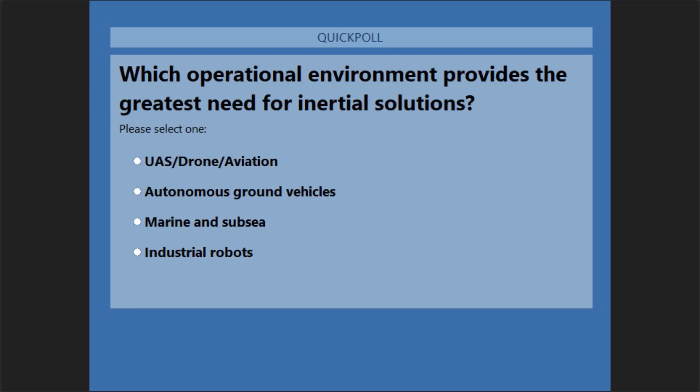Absolutely. Coming up on your screen is the first of our polls for today. If you wouldn't mind weighing in on the following question: which operational environment provides the greatest need for inertial solutions? Is it UAS drone aviation, autonomous ground vehicles, marine and subsea, or industrial robots? So coming in with 43% UAS drone aviation, 34% autonomous ground vehicles, 15% marine and subsea, and 9% industrial robots.

Alan, any thoughts here? Well, this question is what our British friends might call a poser.

It's a pretty difficult question to answer because all of the candidates, with the exception of the last one, industrial robots, all of these environments represent a great need for inertial solutions. We had a bit of a hidden agenda with this question because I think people answered according to which environment they are most active in, but we'll leave that up to debate. Certainly drones need inertial, autonomous ground vehicles do too, and marine and subsea, it's pretty hard to live without it. So I think what this answer reveals is the participation of various segments of our audience in these particular sectors.

We'll find out more as we go through the webinar. We're going to hear today from three speakers: Ralph Hopkins, Skip Ashton, and Roger Ward.

First up is Ralph Hopkins, a distinguished member of the technical staff and a group leader in the Positioning, Navigation, and Timing Division at Draper. Ralph is responsible for the design and development of inertial instruments and sensors. He has served as Technical Director of Advanced Inertial Instrument Development Programs, including strategic, navigation, and tactical grade gyroscopes and accelerometers. He is an invited speaker for short course tutorials on inertial instruments and inertial technology and has presented internationally for the NATO Science Technology Organization sponsored lecture series and symposia on navigation technology. He holds a bachelor's and master's in mechanical engineering from Rensselaer Polytechnic Institute, a master's in engineering mechanics from Columbia University, and a master's in engineering management from the Gordon Institute of Tufts University.

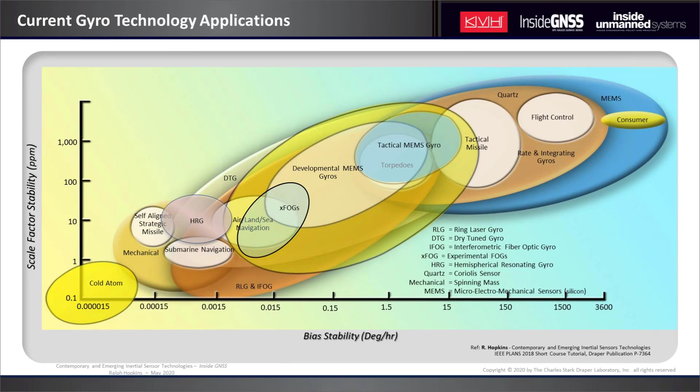This chart is an attempt to capture the performance and application space of different gyroscope technologies. We have the two key inertial sensor performance parameters plotted on the two axes: bias stability on the x-axis, scale factor stability on the y-axis. In the region of the origin, we're in an area of very high strategic grade performance. As we move out diagonally, we enter into the navigation grade and coarser tactical and consumer grade performance regions. This chart illustrates what I like to call the small gyro problem, in that miniature MEMS technology hits a performance wall at roughly around 1 degree an hour bias stability range. Higher performing gyros are all larger scale devices, such as optical and good old-fashioned spinning wheel gyros.

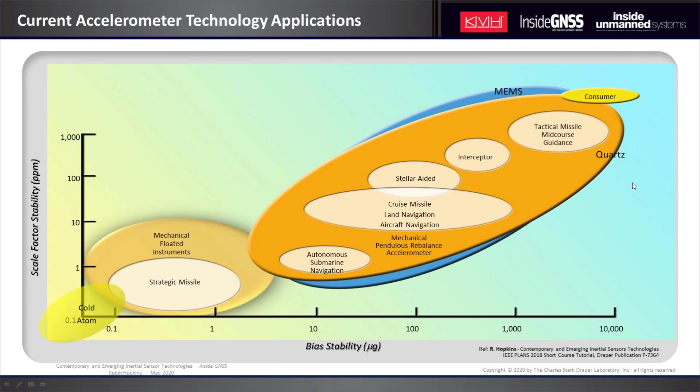This is in contrast to the corresponding situation with accelerometers. Here we have the same plot with bias stability on the x-axis, scale factor stability on the y-axis. Notice that the miniature MEMS technology penetrates quite deeply into the higher performance application space and really covers a very wide performance regime.

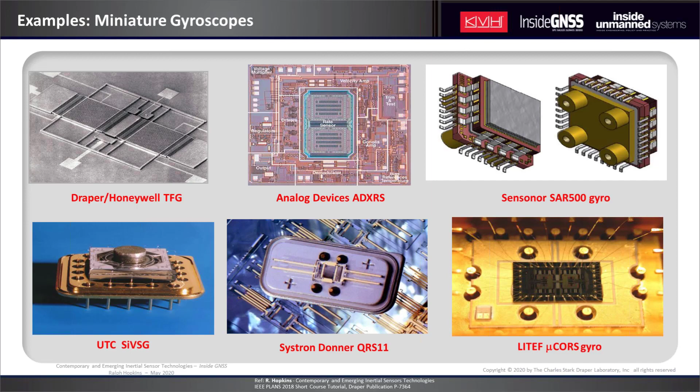This chart shows some examples of miniature MEMS gyroscopes that have been developed over the past 20 years or so. All of these are Coriolis vibratory gyroscopes in that they employ a vibrating transducer element such as a ring or a tuning fork that's driven at resonance. An applied angular rotation rate introduces a Coriolis force loading on the resonating element, which by structural design couples into an orthogonal resonant mode whose response is an indication of the applied rate.

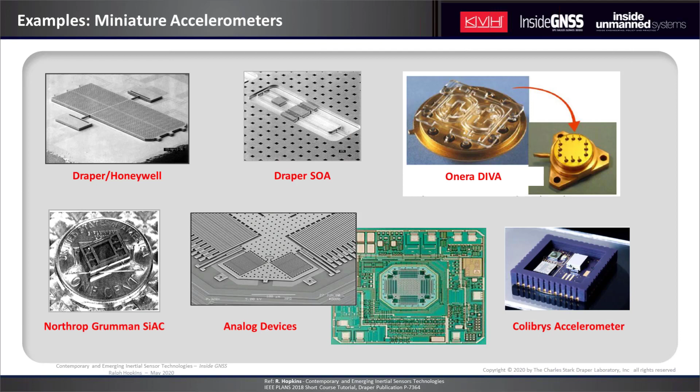Likewise, some examples of MEMS accelerometers are shown here. Some of these use tension and compression in vibrating beam elements to indicate acceleration via shifts in resonant frequency. Others simply use the measured deflection of a flexure-supported mass to indicate acceleration.

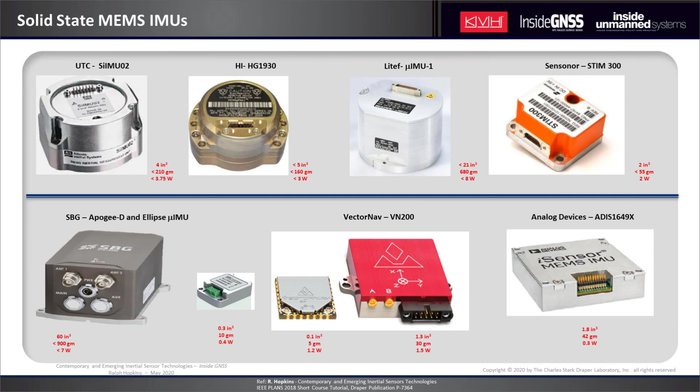Some of these other IMUs are integrated with GPS receivers, which then furnish a GPS inertial integrated solution that has GPS-limited position accuracy. This next chart shows some initiatives in miniature gyro development that are intended to squeeze better performance out of a miniature transducer element.

If you take one of your nice crystal wine glasses at home and flick the rim with your finger, you'll hear a nice clear tone ring out. But actually there are two vibration modes going on that lie spatially at 45 degrees to each other. And if you listen carefully, you may hear a lower frequency wobble, which is the beat frequency between those two modes.

If you rotate your wine glass along the axis of its stem, you'll introduce Coriolis loading on the rim, which drives energy from one of the wine glass modes into the other, causing a precession of the net mode shape around the rim perimeter that's measured as an indication of the applied rate.

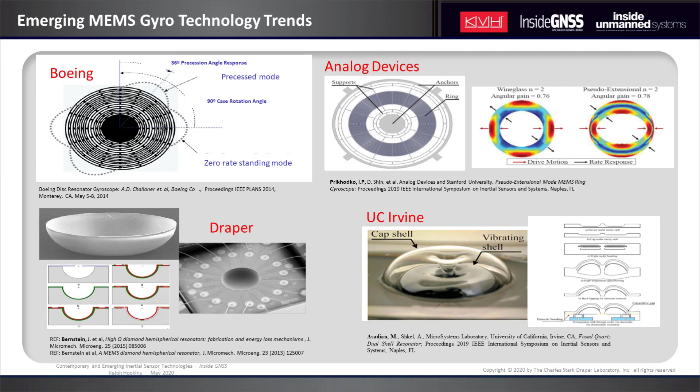These lower two gyros are attempts at miniaturizing the wine glass directly and incorporate novel new microfabrication processes, namely CVD thin film diamond processing, and over here, a micro-scale glass blowing process. The ability to control the resonator uniformity and/or trim or tune the resonator frequencies will be the key to victory in these designs.

Optical gyroscopes are a big part of our webinar discussion today, and normally they are not thought of as candidates for miniaturization because they derive their performance through their size. The total optical path length and the diameter of the optical path length control overall sensitivity.

However, there is an optical gyro architecture that's a hybrid of the conventional ring laser gyro and the interferometric fiber optic gyro that has potential for miniaturization while maintaining higher performance. The ring laser gyro resolution is controlled by the sharpness of the optical cavity, or finesse. Ring laser gyro optical path length is short, but high resolution is achieved through multiple passes of the light in the resonator cavity.

IFOG resolution is driven by the overall path length. The interferometer output is formed with a single pass of light, but high sensitivity is achieved through long path length.

So employing a fiber coil as a ring resonator, then, versus an interferometer combines the best attributes of both architectures. You have multiple passes of the light forming an optical resonator of very long path length. The combination of these two features would permit a smaller diameter coil without sacrificing sensitivity.

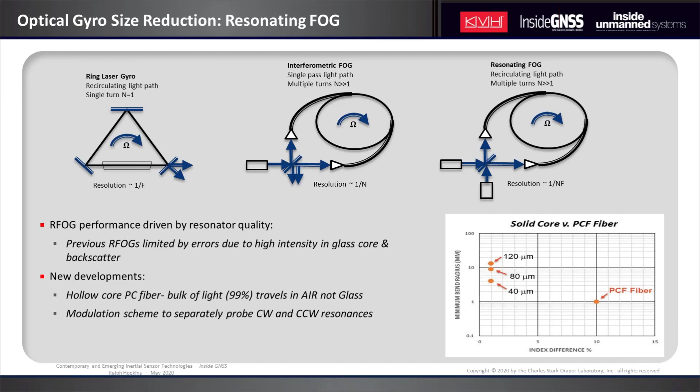Also, the emergence of hybrid silicon photonics technology, which enables fabrication of photonic components directly on low-loss waveguides, has promise for form factor improvement. The SOI substrate is like a printed wiring board, and the CMOS layer is like the active circuit components. The photonics chip is laid out such that the CMOS devices are positioned over regions where the substrate waveguides neck down. This pushes the optical field up into the active device where the electric field can be detected, amplified, or manipulated to modulate the optical phase front.

So the miniaturized front ends enabled by photonic integrated circuits and tighter coil diameters enabled by new fiber optic technology—it's conceivable you could see FOGs in a bottle cap size form factor.

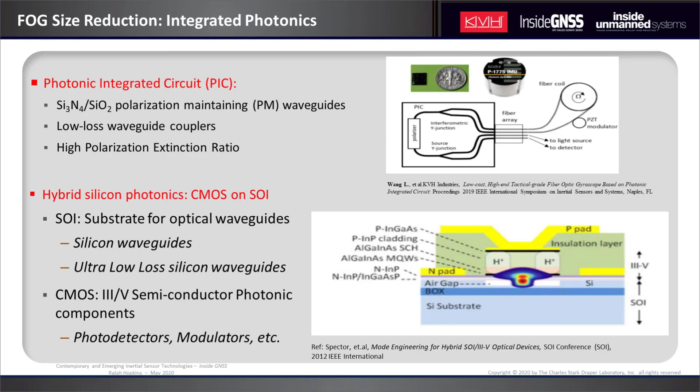Aside from miniaturization, the photonic integrated circuit technology offers significantly improved reliability and reduced production costs. So we have these terrific new miniature IMU products available to us that are driving new application areas: personal nav systems, search and rescue robots, autonomous vehicles. And with these miniature IMUs, we have a handle on the size, weight, and power requirements of the mission.

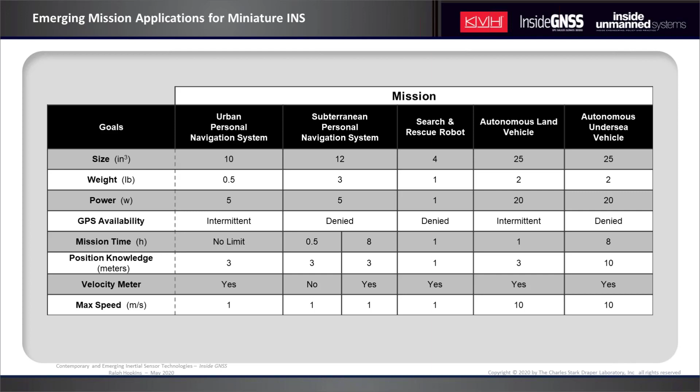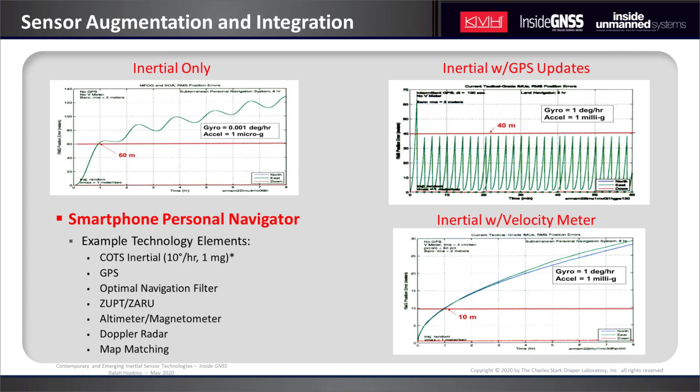To conclude, the MEMS inertial has proven to be a disruptive technology that has led to a whole new application area in the guidance, navigation, and control industry. It has enabled the insertion of a GN&C function on vehicles where it was previously impractical due to size, weight, and power considerations. We briefly touched on some tech trends associated with the relentless and enduring imperative of pushing performance improvements in inertial components, specifically gyros. Many of the emerging application areas for integrated navigation systems feature a GPS-denied scenario that will drive hardware solution architectures that incorporate a suite of augmentation sensors where the inertial instruments serve as just another chipset in the overall design. The value proposition for developers then is in the overall integrated system performance, not the individual components.

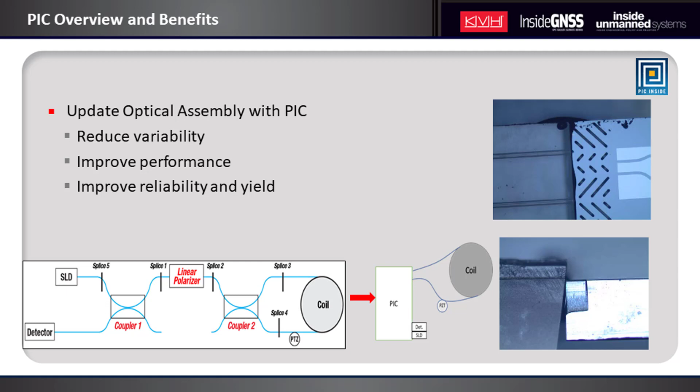So PIC testing is an interesting problem. Semiconductor testing is very well defined, and JEDEC is used around the world by lots of companies, and it tests the device, the package, electrical characteristics of the device, strength, and lifetime. You really can't sell a semiconductor product today without evidence of these tests.

But many of these tests really don't apply to an optical part, or the conditions are kind of stringent. So to accelerate life testing on a semiconductor, you may run it up to 130, 140 degrees, and that's a little more difficult to do with some of the optical components and fibers.

On the other hand, we've got optical testing defined in Telcordia standards, and that's also a pretty well-defined set of tests. The PIC is really a combination of both these semiconductor and optical tests, and has to reflect the design and your expected failure mechanisms.

So the testing really should reflect what you expect out of your product standards and requirements. And so what we call our DVT testing, design validation and test, is to validate the design, but also the process limits and acceptance to be used.

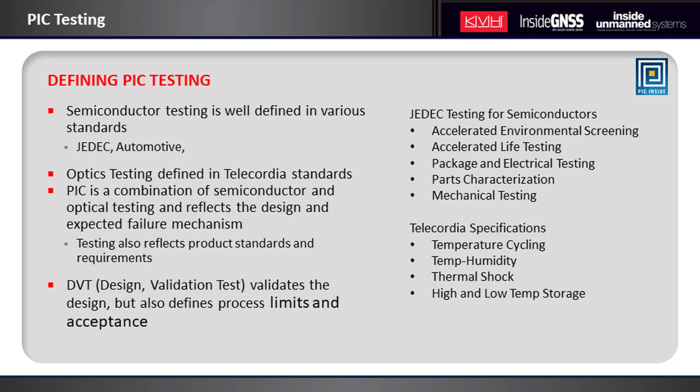So for KVH, this was a critical step. There was obviously quite a bit of testing conducted, and I'll give you a bit of summary of that.

In addition to early engineering testing, we took parts and put them in risk reduction testing, which was early design units that we put into temperature cycling to allow evaluation while the design and manufacturing flow were being finalized and updated, and we went through some different variations of the design.

And then for the DVT testing, we defined for the PIC and fiber array a set of tests: temperature cycling from minus 55 to 95 for 1,000 hours, temperature and humidity where we went at 55 degrees Celsius and 95% relative humidity for 264 hours, and shock on all axes at different levels from the mil standard.

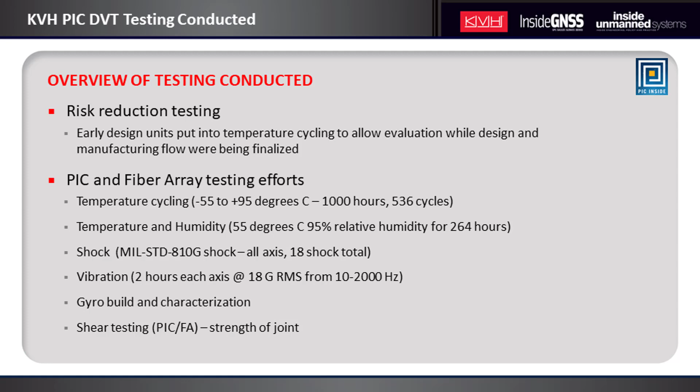We're doing vibration, 2 hours on each axis. And then, of course, we've got to do gyro build and characterization of those. We also added shear testing of the PIC and fiber array joint, and I'll discuss a little bit how we ended up with that.

So DVT testing is really intended to be done on the finalized design, and it's both at the part level and at the product level, using the final manufacturing flow.

But there's a bit of a feedback loop here, because we need a lot of parts to do DVT testing, and for that we need to optimize our manufacturing flow. So it takes time and some iterations to get through that process.

And then our DVT testing also included other parts of the optical assembly, just for completeness and to ensure we were hitting everything in the design.

Part of this is testing a sufficient quantity of materials to provide confidence in the results of the manufacturing process. This is taken right from some of the semiconductor processes, where you typically use 3 lots of semiconductor wafers built at different times so you can analyze the variability wafer to wafer and lot to lot from a given manufacturer.

We took that one step further because we actually did 2 PIC designs with different suppliers and process technologies. Many of the semiconductor processes used for standard chip production today at large fab houses like TSMC, you would never think of doing 2, because those processes are very mature and marching down Moore's Law. This is different - there are different design rules at different process houses, and your design has to reflect those. Completing 2 PIC designs not only gave us 2 different suppliers and design rules, but also gave us diversity of supply chain.

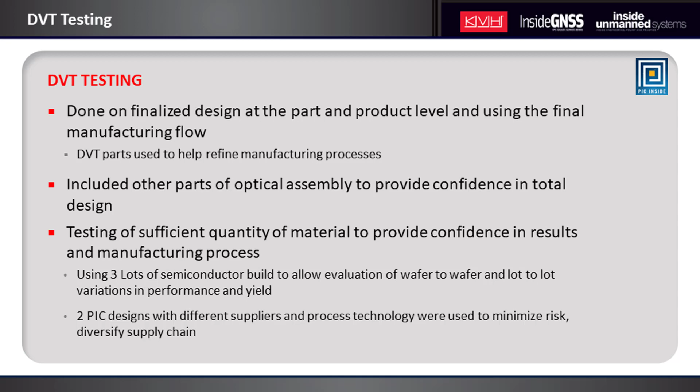Step 1 in our whole process is incoming parts validation. We test our parts before we put them into assembly to ensure they meet our design intent and the optical budget for the overall system. For the PIC, we can evaluate it using wafer test structures, put test structures on the PIC themselves, and do free launch into individual parts and measure them discretely. For the fiber array, we take those in from the supplier and measure them individually for acceptance. For each part, we track the supplier test results, our own incoming inspection results, and at each step of the manufacturing process there are manufacturing validation measurements, then final tests of the individual assembly as they're put together. These are all put in a database so we can track them throughout. The key parameters relate to the optical budget - power loss, insertion loss, extinction ratio, the split ratios of the couplers, and repeatability of these things over temperature.

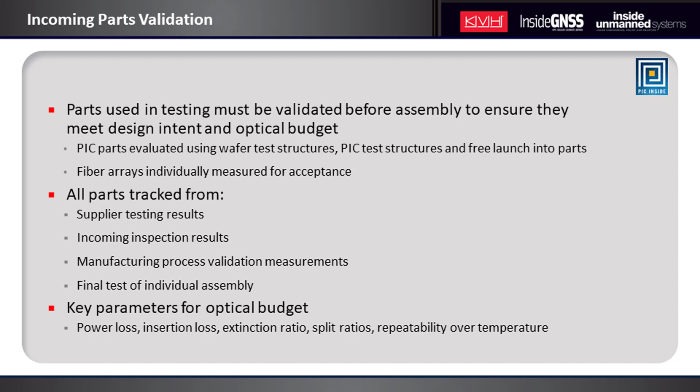Okay, let me turn this back over to Alan for our first break.

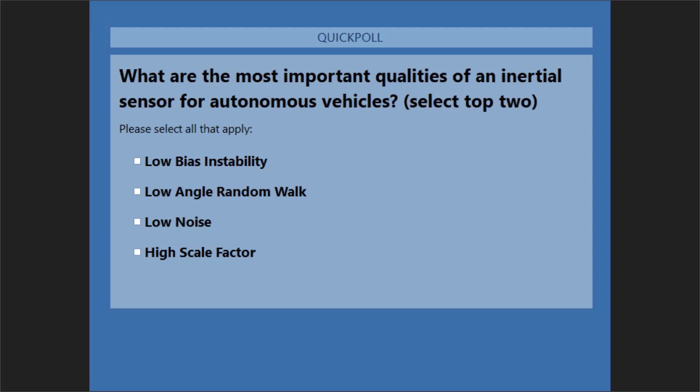So I got a front runner there with 78% low bias instability, followed by 59% low angle random walk, 33% low noise, and 12% high scale factor.

So any thoughts here, Alan? Well, I think the underlying aspect this question reveals is that most of our audience is involved in the application realm. Obviously, low bias instability and low angle random walk are the key factors or parameters you want to look at in application of inertial technology. So that's where most of our audience is at. But I think we have some people in the manufacturing or integration realm because at least a little bit more than 10% are listing high scale factor—that's a manufacturing concern. Of course, low noise is going to be present in almost any concern, but yeah, I think we're looking at an audience that is primarily involved in applications, and there's going to be a lot of interesting material for them in the third part of our presentation when we look at the future of fogs.

Right now, let's go back to Skip and the conclusion of your presentation, Skip, on PIC reliability and testing and the release to manufacturing, where the pedal hits the metal, so to speak.

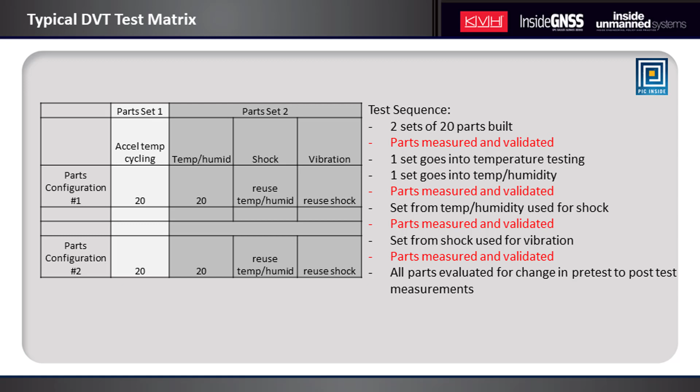This is an overnight test where we're running the parts in the chamber, and we're actively monitoring them outside the chamber. This takes a bit of time, as you might expect. We can run multiple sets at a time, of course.

And then you get into the overall results. The chart on the left here is showing different wafer IDs from one manufacturer. We've got the average loss from the PICs we've worked on for each of those wafers, the minimum ER we saw for the assembly, the insertion loss repeatability over temperature - that's a measure of how it changes over temperature. Then in the final column, you see the power balance, which is a reflection of the coupler.

The chart on the right is the loopback loss, and you see a nice distribution settled around 16 dB - that's us measuring the overall loopback loss of the assembly, to get an idea of how the optical budget is doing. You see some nice normal results in that kind of distribution.

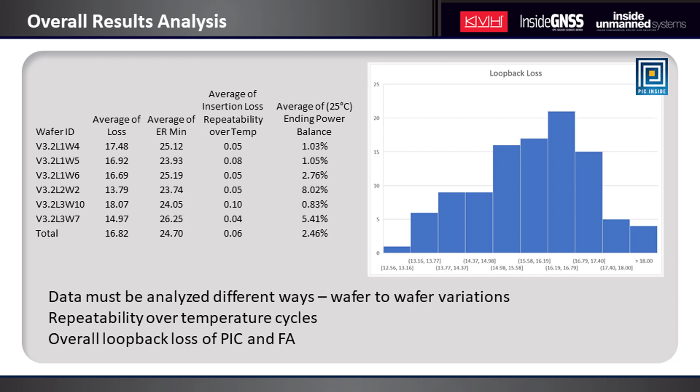I mentioned at the start of this the manufacturing process development. DVT is needed to validate the design, but really the point is we want to be able to produce this reliably in volume. That requires a real joint effort between engineering and manufacturing. This whole process started with manual assembly and validation of the PIC design and fiber arrays on the benchtop. But we can't expect to build in mass production that way.

So we purchased an automated alignment machine that you see some pictures of there. This process - the machine does a visual inspection of both the PIC and the fiber array. We launch light into one of the fibers of the fiber array and do active alignment of that entire assembly between the PIC and the fiber array. When it has it properly aligned and gapped, it applies the adhesive and cures the joint.

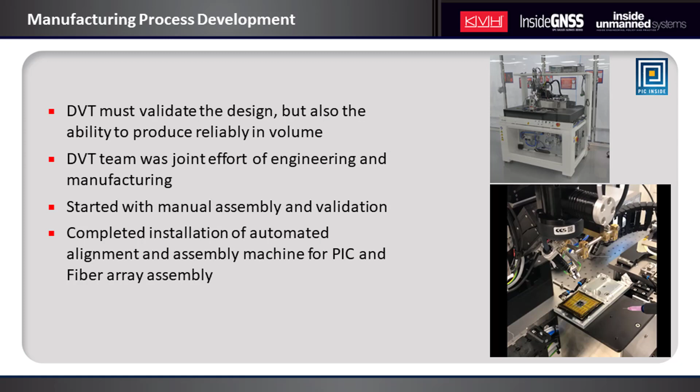That entire process of how best to align it, launching the light in, the adhesives to use, and the curing process are a good example of a joint process required between engineering and manufacturing as part of the DVT effort to make sure we can build these consistently.

So what did we learn from the DVT testing? We did a lot of engineering testing and design validation to reduce the risk with DVT, but it didn't uncover all the issues we found. In particular, humidity testing revealed a weakness in the PIC fiber array joint that was not seen in other testing or validation - wasn't even seen in the gyros we built in the early days with alpha units that went through vibration and things like that. But that's the point of doing this kind of extensive part-by-part testing.

Once we found that, it required us to double back on the process a bit, change the adhesives in the assembly process to increase the robustness of the joint. I mentioned we added shear testing - that shear testing of the PIC fiber array joint was a way for us to get a better, quicker measurement of the strength of that joint and the adhesives and the assembly process without waiting for a 264-hour humidity test. Because the problem with 264-hour tests is they really take 264 hours, and there isn't a great way to speed them up. So we added shear testing as part of the DVT to give us a quicker indication of that.

The other important lesson from all of this is building larger batches of parts provided us much better visibility into the manufacturing yields and the process improvements. So it's important for DVT that you do larger batches of parts, but it's also a critical development step between the teams so that we get the right process on a day-to-day basis out there.

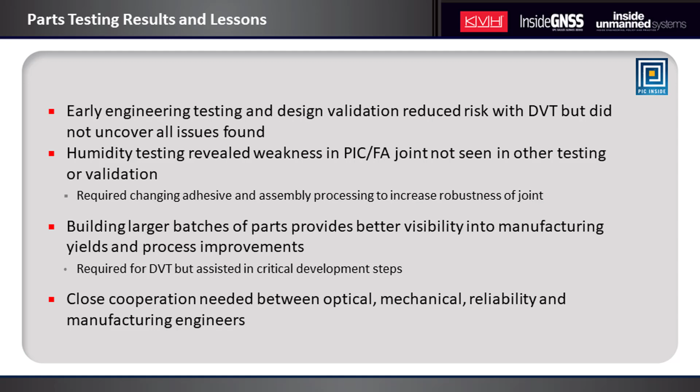And so that effort really required close cooperation between the optical teams, the mechanical team, reliability engineers, and the manufacturing engineers to make sure we could build this properly.

I've been talking a lot about individual parts testing and how that builds up to reliability, but that's only part of the testing. Once we've completed that individual parts testing, and really in parallel with that, the final proof is in operational gyros. Nobody's buying individual parts from us, they want to buy an operating product. So we want to build numerous gyros with different configurations of the parts, in sufficient quantity to allow comparison both between these different parts configurations and with our existing manufacturing data.

Now we're moving on from those optical measurements we're doing on the part level and relating those to what we expect at the gyro level: bias, scale factor over temperature, the linearity. And this longer-term reliability at the gyro level is built up from this parts reliability that we learn about through the DVT, and that overall assembly of the optics, the mechanical, the electronics, and the software.

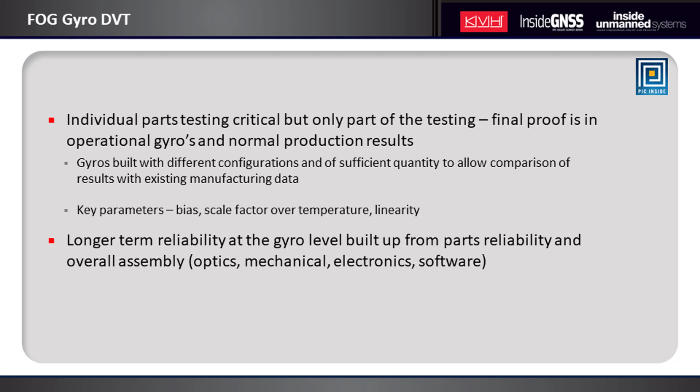So we continue to do that. Our current status on this DVT is we've completed our initial DVT efforts, and as Sean mentioned at the beginning, we're releasing the PIC into products. So we're generally done with that, finalizing our results and finishing up all that paperwork, the part everybody loves.

We will continue to do ongoing testing to monitor the design through early manufacturing. The point of that is to improve the yields and the process controls, any further improvements on performance, and we can adjust our acceptance criteria as we continue to increase the sample size and lot sizes. So this is an ongoing joint effort with both engineering and manufacturing as we continue to monitor that.

So thank you for that, and let me turn it back over to Alan.

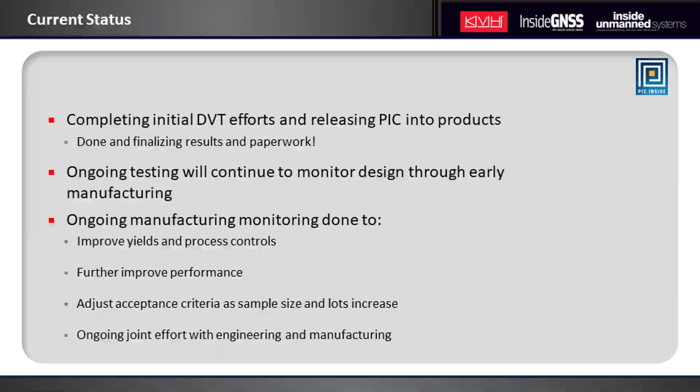Thanks very much, Skip. And with the release, as you mentioned, of the photonic integrated chip into actually available products, we're opening up a whole new realm of applications for fiber optic gyros.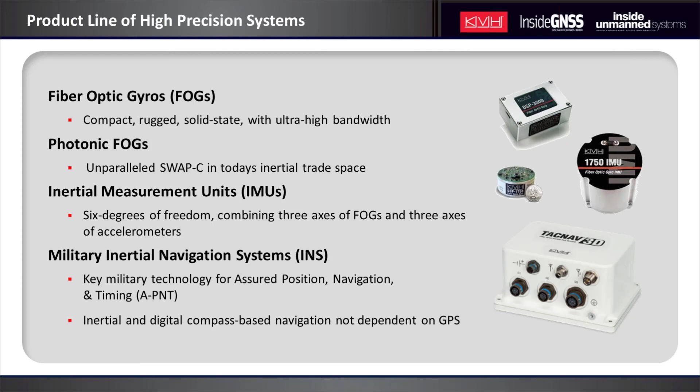So KVH understands inertial sensing needs for continuous navigation and guidance. For example, our TACNAV products are used in armored vehicles to provide hours of uninterrupted precise positioning, heading, and orientation during GNSS disruptions.

Talking about dead reckoning for a moment, precision inertial sensing using fogs allows you to meet both mid and long-term dead reckoning needs for continuous autonomous navigation. By that I mean hours and minutes of outages of GNSS. This is key for vehicle or drone safe operation, such as in urban canyons during loss of GNSS, particularly in all weather, such as snow or rain, or other conditions that can degrade optical sensors and radars, LiDAR for example.

KVH fogs meet the autonomous market needs for performance, but the challenges are: how do we achieve a better price, how do we achieve manufacturing scale for the new and emerging markets? Silicon photonics allows us to rethink fog performance, manufacturing scale, and price. The inherent ability to design and scale fog performance up and down using different components, such as coils, SLDs, and other devices, allows for new flexibility in product performance and pricing levels. So I'll discuss this in a little bit more detail.

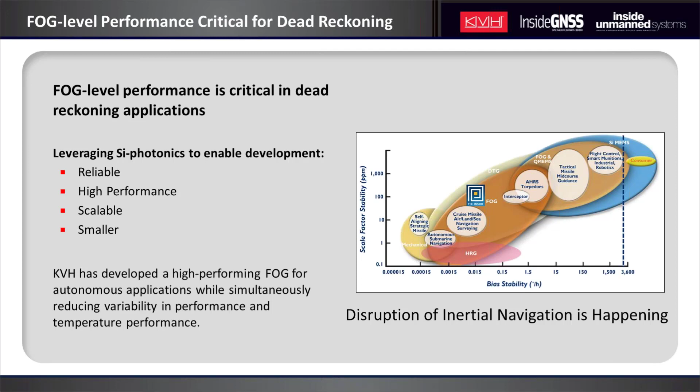As Skip talked about, the photonic integrated circuit replaces the all-fiber couplers and polarizers with a very small silicon photonic waveguide. What's key about KVH's silicon photonic waveguide is it's very low loss. It has high performance characteristics that allow us to scale fog performance using different types of fibers, different lengths of coils, and lower price components.

The telecom industry has proven silicon photonics and the microfabrication and process controls to achieve very high volumes and economies of scale. What's different with KVH is we're not operating at the telecom wavelengths. We operate at shorter wavelengths, which allows us to reduce the amount of coil length to achieve the same levels of performance. So PIC enables KVH flexibility in fog product manufacturing and cost points.

As Skip pointed out, flexibility in supply chain with both U.S. and international suppliers has recently been shown quite important as a result of the COVID-19 impacts.

PIC fogs continue. Manufacturing development at KVH continues on PIC fogs as we work towards higher levels of automated manufacture, skipping some of the semi-automated manufacturing that are employed today. Richard was talking about future developments of hybrid PICs, which we are working on, which will allow us to scale manufacturing volumes to those anticipated in the future.

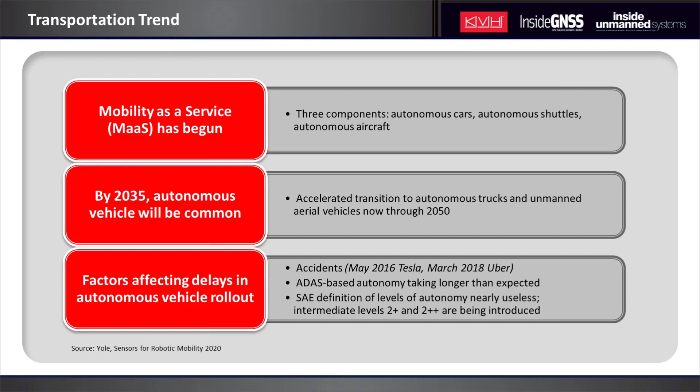Looking a little closer at autonomous vehicles, as you all likely know, it's very disruptive technical innovation, major investments, and major potential for autonomous sensors to support driving, and a transformative change in autonomous vehicle navigation. KVH sensors have been involved since the early days and have been used to drive millions of autonomous miles. Our inertial sensing provides continuous all-weather open road navigation solutions.

As we look forward to this market, we hope for potential benefits but face challenges that may slow the widespread early adoption as originally predicted. There are technical challenges on how to best understand and act on multiple sensors and information sources while lowering the marginal costs. There are societal challenges such as regulatory and government uncertainty. And there are serious business challenges as we anticipate a shakeout of many of the new entrants in certain markets and technologies.

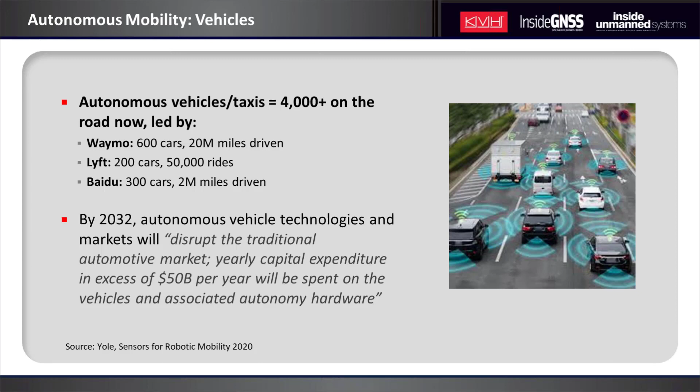Looking at shuttles for a minute, their fiber optic gyro product needs are a bit different than autonomous cars. Today, they generally operate in large cities, which are geofenced rather than open road conditions. Fog size and fog cost are not as challenging as for autonomous cars, which are expected to be. Today, KVH is already used in many successful mobility shuttles and minibuses.

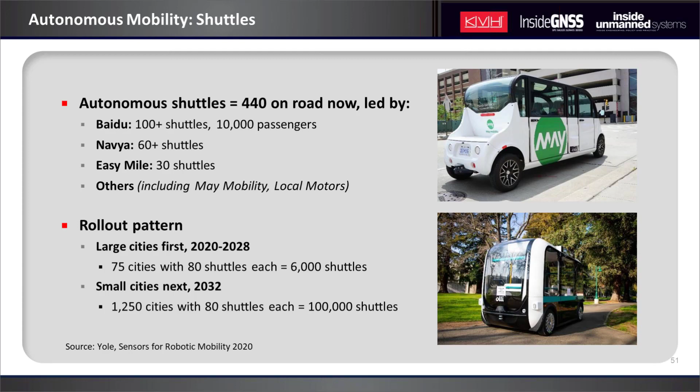Looking at the autonomous aircraft market, which was a major interest in our early poll: autonomous aircraft today are used to perform dangerous or difficult work, such as military drones and UAVs that operate with different degrees of automation. Civilian autonomous aircraft and drones, however, far exceed those of the military. Their uses are rapidly expanding for commercial, scientific, recreational, agriculture, and other applications like surveillance and product deliveries, aerial photography, infrastructure inspections.

Again, the fog product requirements are a bit different than autonomous cars or buses. Usually, small size, low power, and lighter weight are very key, particularly for smaller drones. The development of the autonomous aircraft is presenting new opportunities for partnerships that combine traditional aircraft manufacturers or airframe suppliers with autonomous navigation innovators like KVH.

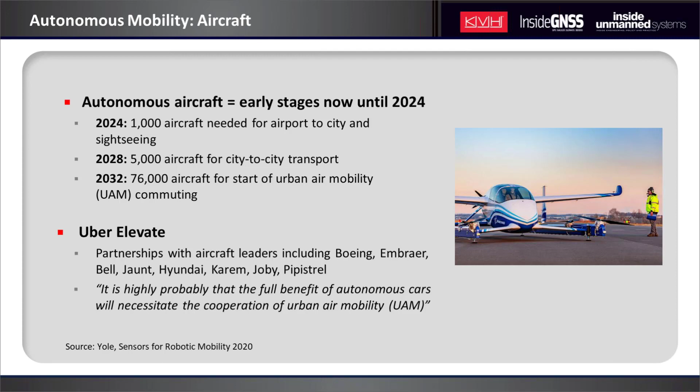As we look at how to package our photonic integrated circuits into our product line, KVH is looking at the various market segments that offer different opportunities. Robotics and agriculture are relatively large markets with moderate growth rates, which could be very attractive. Construction is a very fast-growing but still small opportunity. Pipelines are small and steady. This is the kind of information that factors into the future fog products that KVH is looking to launch.

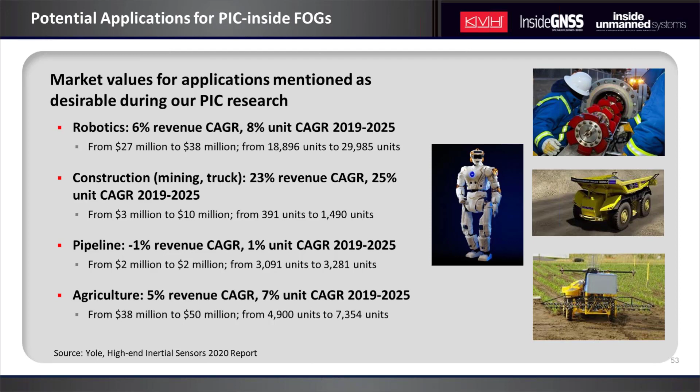Talking a little bit more about performance for autonomy in our fog products, the scalable PIC fog performance that's allowed means we can tailor the performance for different needs. Focusing primarily on continuous autonomous navigation, which is when inertial sensors can shine, inertial sensing offers very fast update rates, 1,000 times or more a second may be needed. It offers precise positioning in all weather conditions.

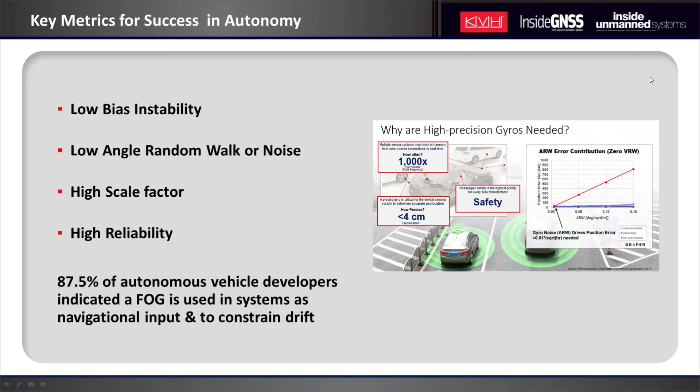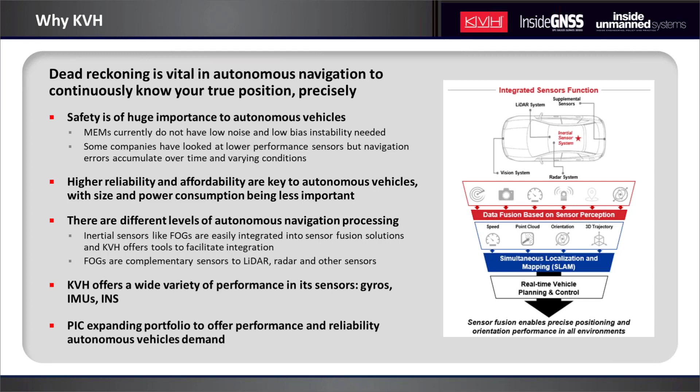So as we look at KVH's role in autonomous navigation, KVH is looking to reinvent to meet the evolving autonomy markets and needs. KVH is already part of the autonomous world today, and we're working with many autonomous navigation companies. KVH is looking at the renaissance of FOGs using photonic integrated circuits to make a more scalable, more affordable inertial FOG. Today we are focused on flexibility and performance, ranges, reliability, and manufacturing scalability in the new products that we plan to launch.

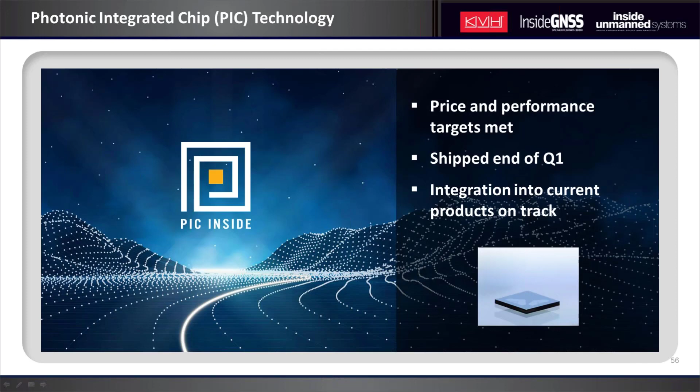With the development of a robust, high-performance silicon photonic-based fiber optic sensor, KVH believes there's no limit to how autonomy will continue to impact and improve lives. It'll allow us to continue to do dangerous jobs so you can stay safe, to bring freedom of movement to those who can't or choose not to drive. And it's leading the way to an exciting future. Thank you. To you, Alan.

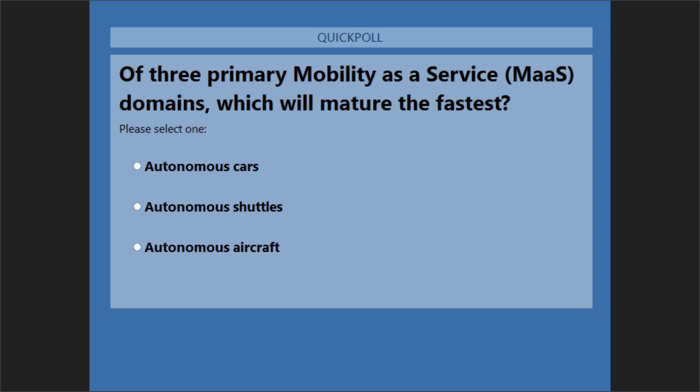All right, it looks like our front runner there is 56% autonomous shuttles, followed by autonomous cars and then autonomous aircraft. Any thoughts here, Ellen?

Well, this is in line with what I would expect because autonomous shuttles are coming online very quickly. There are a number of them operating out in the world, and people can jump on board them and take a little driverless ride to get a taste of what's coming. Autonomous shuttles are with us currently, and if you haven't seen one in your neighborhood yet, keep your eyes open—they are spreading pretty rapidly. Autonomous cars are going to take a little bit longer. There are a lot of pioneer developments in the works and a few actually on the road under controlled circumstances. This is obviously the biggest market segment. It's not quite here yet, and it's going to come along behind autonomous shuttles, drawing a lot of experience from what's discovered in the operation of autonomous shuttles to realize autonomous driving, with autonomous aircraft coming up. But it's going to be a little bit later, and I think all of the audience concurs on that.

Well, not all of them, everyone except 16% concur on that one.